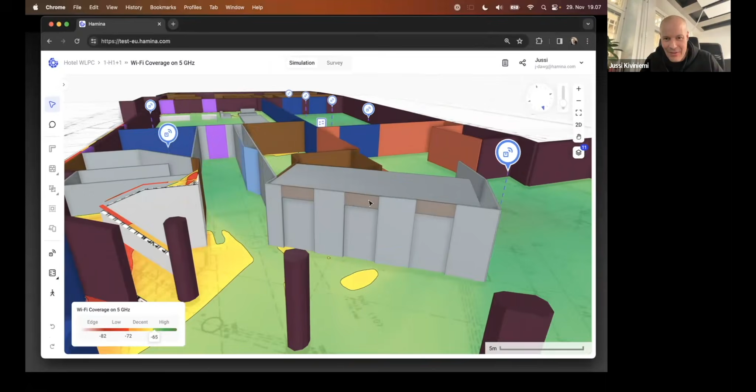A couple of things we have upcoming: 3D. The 3D look and feel - some of our guys are very enthusiastic about how the product looks, how it feels, and how it works in 3D. Let's take a look at this. I don't have a before and after, but some of you, especially heavy users, may notice slight differences in how the product looks. If you observe the shadows, how things look, how the outlines look, how some things are now shadowed, you may see a bit of a difference in the product.

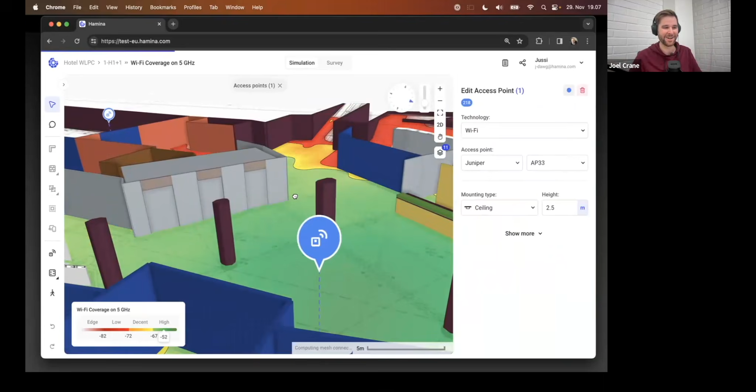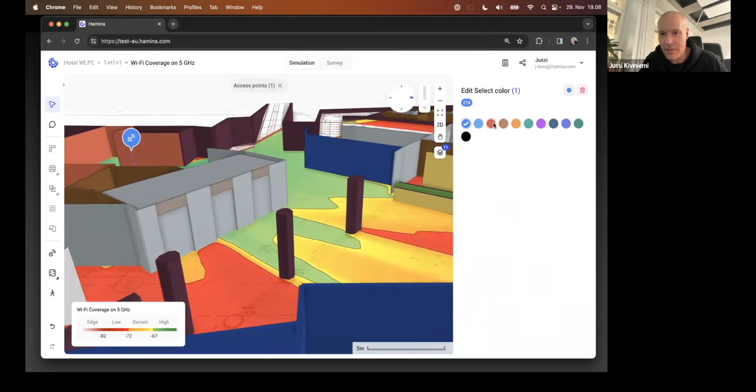By the way, anybody recognize this lobby here with the elevators, the front desk? Joel, ring any bells? Yeah, it took me just a second, but all of a sudden it clicked, and I totally recognize that lobby. Somebody put it in the chat if you recognize it. Looks like Mark wins, Petri's a close second, Martin third, and Steven says red bar - yep, absolutely, let's put the AP in the red bar. So this is the hotel in Prague. Can you make the AP red? Can you make it red? I wish we had a change color option for the AP - oh yeah, we had it from the get-go. That's right, there we go, red AP, that's definitely suitable in red. I'll put it in the corner where Drew Lenz and Sam Clements were causing some kind of shenanigans the other day.

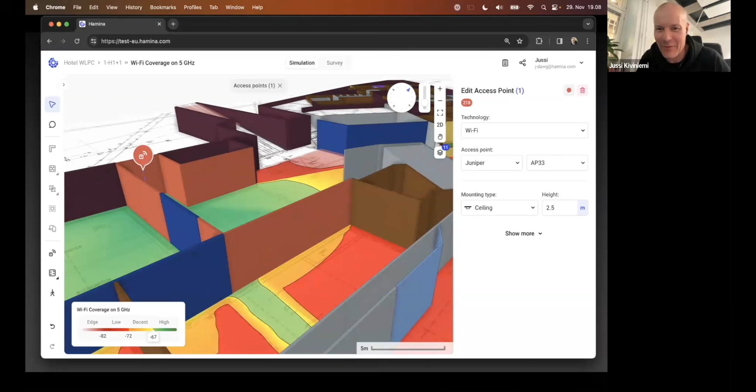So that's there, but yeah, just little things like performance improved, look and feel improved. It's trying to take care of the little things as well, because as a product manager, isn't it so tempting to look at just new features? But you're really good at keeping me in check with that, and so is our R&D - like, no, that's not gonna happen now.

So I appreciate that. 3D Roaming Man has gotten some new flavor, and there's some site survey stuff we'll talk about in a bit. Roaming Man will get a significant update pretty soon. Currently our Roaming Man is pretty amazing - you can take any client device, simulate the most common client devices and their route throughout the wireless network, see how they roam, what their performance is, stuff like that.

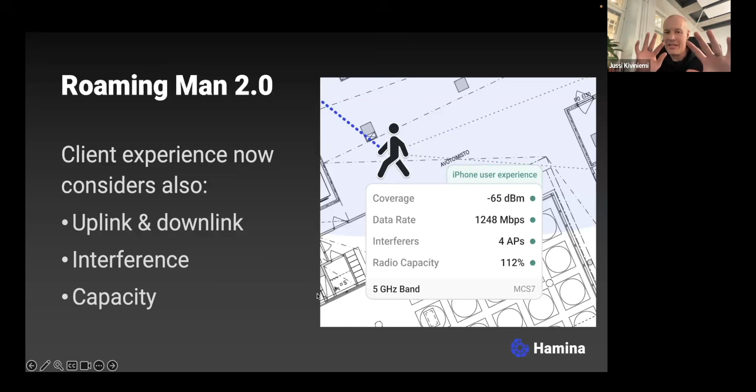In the new Roaming Man, not only does it consider things like association, roaming, coverage, and data rate, but it also looks at key well-being statistics for you as a wireless user. Things like interference, CCI, whether the radios are at overcapacity, and it considers both uplink and downlink directions.

What do you think, Joel? Should we get to the beef already? Let's do it.

And then there's the pre-deployment, often it's like AP on a stick. But whether it's AP on a stick or not, it's good to, if you have a chance, go on site and walk around a bit to get a feel for how thick the walls are, how the RF behaves. If I don't have an AP on a stick or time for one, I like to just walk around the site quickly and take some surveys, even of the existing network or whatever is out there, because even with that I can get a decent understanding of how the RF works.

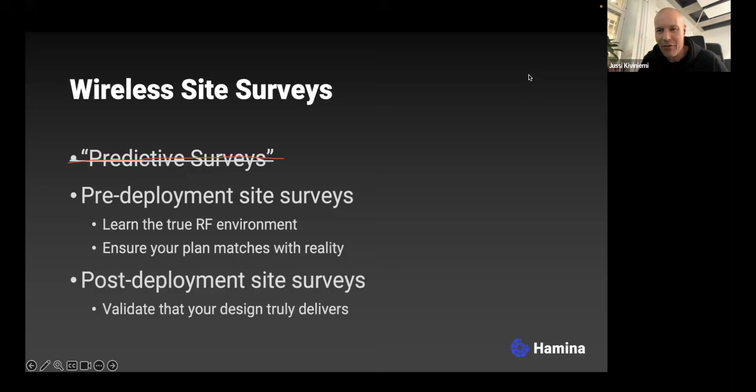Of course, there are other types of surveys, like troubleshooting surveys. I'm sure all of us tool vendors would love it if everybody surveyed every day, but let's face it, it's not going to happen. I don't think people will survey weekly, monthly, or even yearly. It's often a reactive thing. If you have time and energy, I'd recommend periodically surveying the network. But the Wi-Fi dashboards today from the leading Wi-Fi vendors are pretty good at keeping the Wi-Fi in check to a large extent. If you run into problems, that's at least when you should go out. If you can't figure it out from the dashboard, then a survey would be one option.

All right. Oh, and there's your annotation still, Joel, by the way. I have no idea how to use Zoom. Sorry, I just took it off. No worries, I was like, I don't know how to use this.

But yeah, here's really, what do you think, Joel? This is what it comes down to. This is kind of how it started, and at the basis this is still what we're doing, just with different tools. But remember in the beginning there was more of this, like dragging a wireless device around and taking measurements by hand. It's still a thing, and nothing wrong with that. No matter what the tool, isn't it still about taking measurements somehow and then writing those down in some capacity?

Yeah, I think I heard you recently compare a site survey tool to almost like a note-taking tool, where I mean, it's a lot more sophisticated than pen and paper. And remember the red solo cup design method, where you take a solo cup and the big end was your 2.4 gigahertz cell, and you flip it over, and the little end was the 5 gigahertz coverage cell.

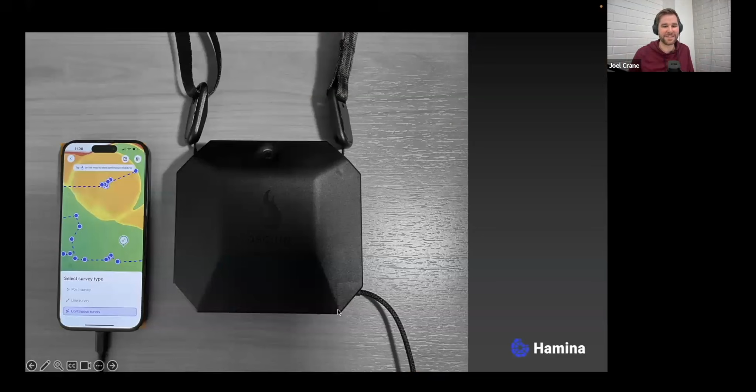Obviously, we've come a long way since doing that, but I think just about everybody has done that at some point. But now we have the ability to really take measurements and plot those on a map. So it is a note-taking tool, just a lot more sophisticated than it used to be. Here's our note-taking tool, and it does the same thing - it plots wireless readings on the map, and also lets you plot custom notes and photos. It's essentially a notepad or note-taking tool, just a little bit more advanced, lighter, and easier to use than before. But yeah, it's still the same stuff.

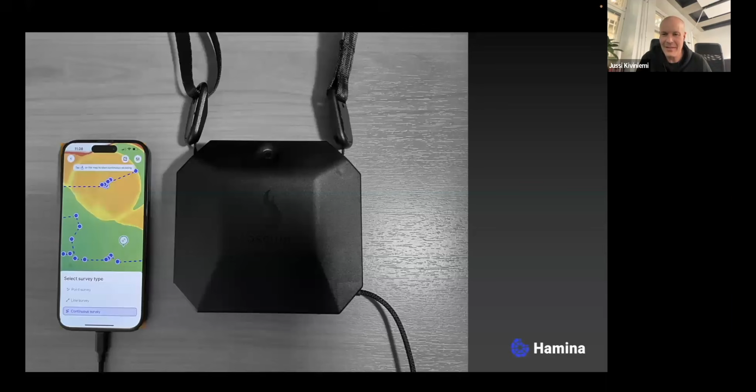So our solution, in short, is the Onsite app by Hamina, and then its connection to the Hamina cloud, and being able to see that also on the Hamina planner. And then our hardware partner Oscium has created this amazing device, Nomad, which is essentially a high performance Wi-Fi measurement device - 2.4, 5, and 6 gigahertz, all the standards including Wi-Fi 6E and Wi-Fi 7 completely supported. And the Onsite app will take a look at that.

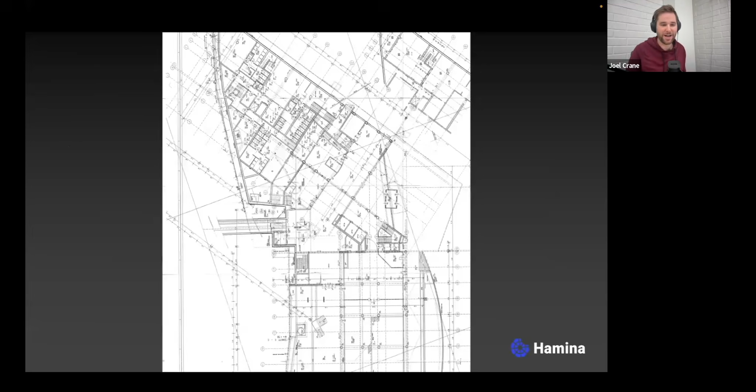Encourage people to participate in the chat, Joel. If there's a single negative comment, we will ban the chat. Sorry—yep, don't say anything negative, or you're going to get perma-banned. Exactly, and the chat will be closed. Forever. I'm kidding.

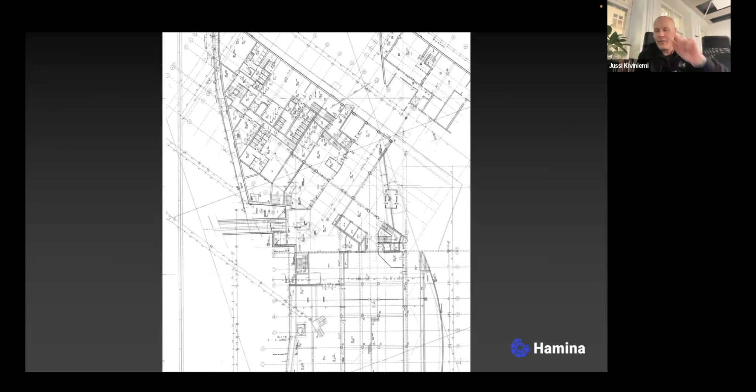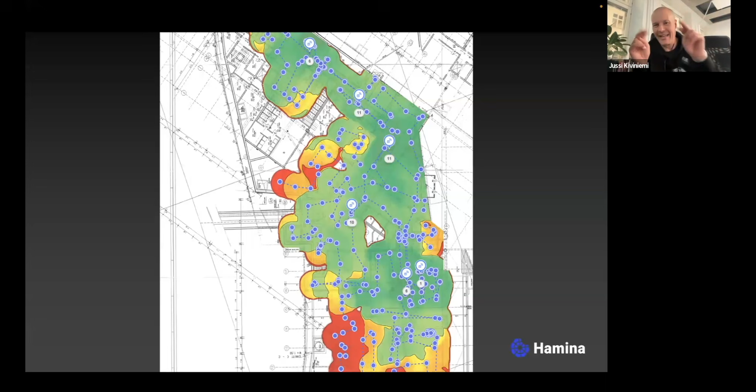Let's talk about the theory of site surveys. Here's what the Wi-Fi measurement process looks like: you have a floor plan, you take notes and walk around, and somehow your route gets documented on the floor plan. The end result is usually something like this—often represented as heat maps. There are other ways to visualize it too, but at the executive level overview, it's usually some kind of heat map. So how do we get there? How do we get to the heat map?

First of all, there are different survey types we'll cover today. These are very infrequently covered in detail, so we should look at each survey type a bit, at least the first three for now. There's manual location entry—that's just a term I made up—essentially surveys where you manually need to continuously, more or less, plot your location. Then there are some automated location entry methods as well. I actually posted a few months ago on LinkedIn about Apple's RoomPlan framework, so you can find a video about that on my LinkedIn too. I think some surveying will become automated moving forward; the technology isn't quite mature enough to be very reliable yet, but it's getting there.

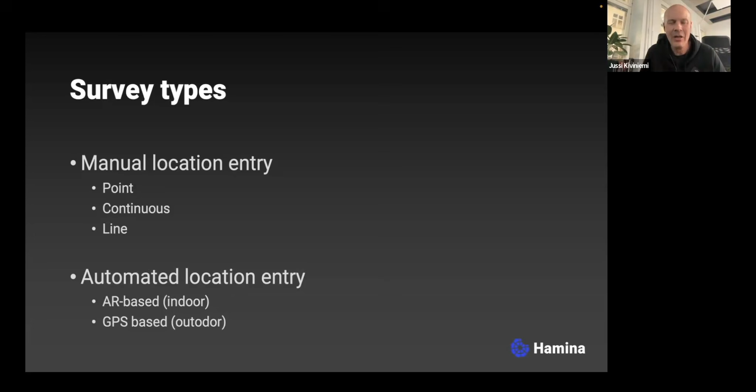Today we'll focus on the manual approach—clicking on the map. How do we click on the map? How is the survey data collected? How is the survey data plotted on the route?

Let's talk about the point survey first—there are different terminologies for this, but we call it the point survey. You click on a map, wait a couple of seconds, and the data is collected for that point. Then you move to the next point, wait again, data is collected, and you repeat that as many times as needed until you've painted the map green, so to speak, until you've collected enough measurements from the area. If I were a beginner, this would be my choice of method—it's very relaxing and easy to use. You can take all the time you want to find your place on the map, then click and wait a bit, and there you go.

However, while it's super easy and almost hard to fail, it's also great—even if you're using other methods elsewhere—for spaces that are cramped, or if you're required to take a spot from a hotel room right at the desk, for example where people work, or situations like that.

Stop and go, or point survey, is the perfect method for that. However, it can be a little slow, and data is only collected where you click. So only when you click is data collected, not between the clicks. There's no interpolation between the clicks.

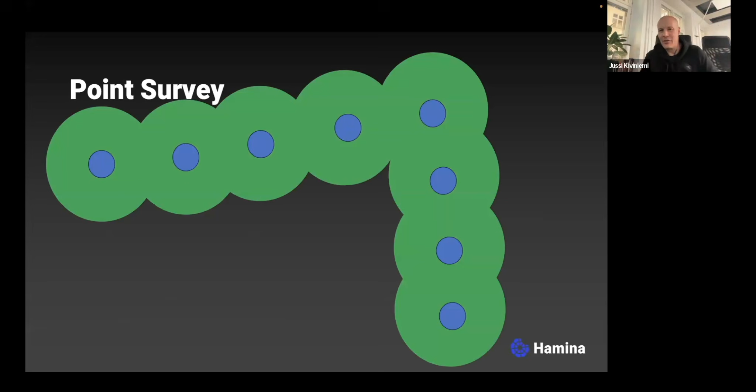For you experts, this may sound simple, but we'll get to the beef after this slide. Continuous survey means the tool is continuously collecting data. The wireless measurement device is continuously scanning all the channels in the Wi-Fi network, and your iPhone is continuously collecting all of that data. It doesn't stop, it keeps cycling through those channels and storing that data.

It's your job to keep clicking on the map all the time, every time you start walking, every time you stop walking, and every time you turn. Usually turning isn't a problem, and starting or ending isn't a problem either. But here's the challenge. This is what a typical continuous survey looks like.

With the continuous survey, the pros are it's as fast as you can walk. It's great for surveying in any location as long as you're experienced and know what you're doing. Data is collected all the time, even between the clicks. Even when we're not clicking, the tool is scanning all the time, and the iPhone is storing that data based on those scans.

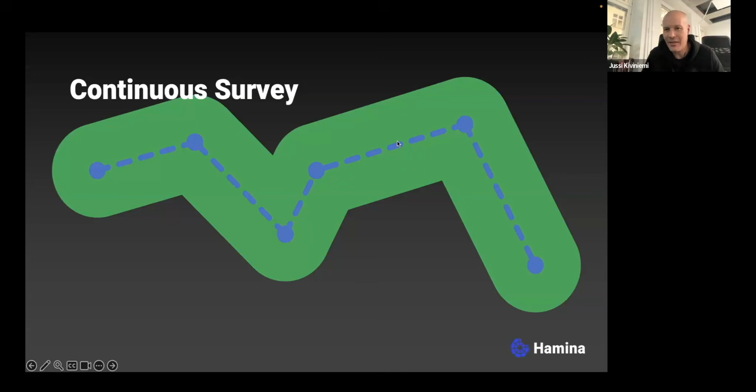So it's not only storing data at the clicks, it's also interpolating data between the clicks based on the timestamp. I know that 5 seconds ago you clicked here, 1 second ago you clicked here, so 3 seconds ago you were here. We know that data we got 3 seconds ago goes here, and we plot that. It stores data all the time until you stop the survey.

So it's great, it's fast, but here's the thing. What we started hearing more and more when we talked to surveyors while developing the survey tool, it became evident that people are not just newbies making mistakes. If you put a fairly fresh surveyor out there, they may do it wrong or shy away from continuous survey. But even people who had been surveying for quite a while made this frequent mistake. This could be a clickbait headline: you've surveyed for 5 years, you're still failing at continuous, and this is why.

So if you thought you knew continuous survey, you tap as you change direction all the time, as you walk around, you tap every time you turn. In here, you have to wait for the door to open. You wait there for 20 seconds, then you continue and you tap.

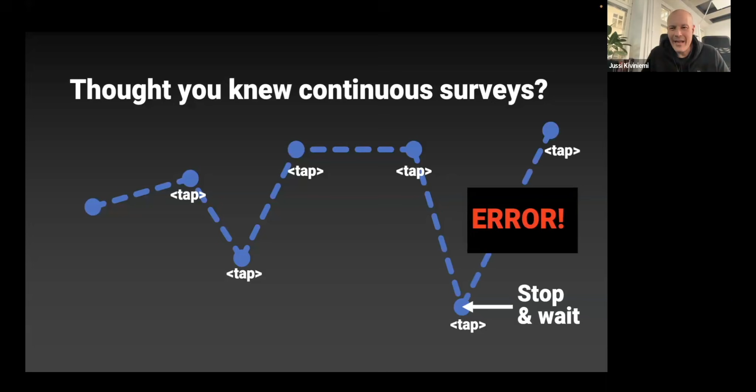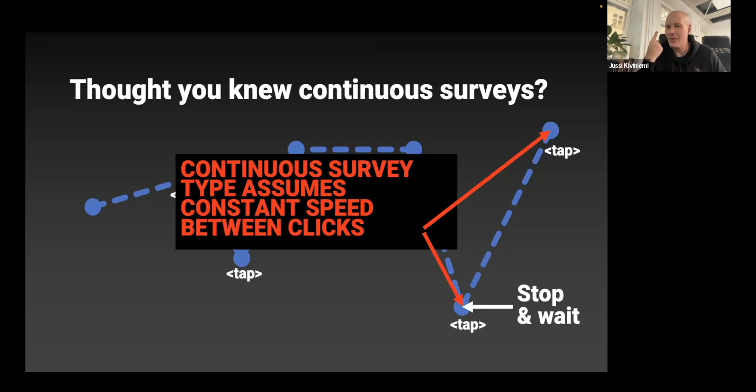Now we actually failed the continuous survey. What happened here is when we were waiting for the door to open, we were standing still for a good 10 or 20 seconds. Even during that time, the tool assumed that you're somewhere between these 2 points, although you're not, because you were standing still and didn't indicate that to the tool. Continuous survey assumes if you click in 2 different locations, you were between those locations very evenly throughout your walk. It always assumes a straight line and a constant speed.

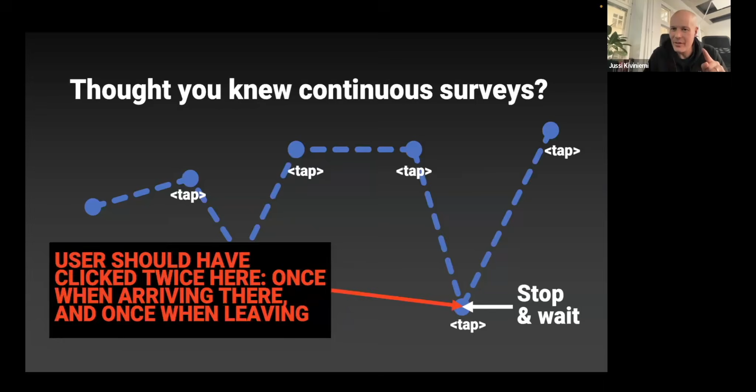What should have happened is the user should have clicked twice here, once when arriving at that location and once when leaving, because he took a break there. Otherwise, that data will not be correctly associated. So let's do it the right way.

Tap, change direction, tap, change direction, tap, walk on a line, change direction, tap, tap. Now we stop and wait here, wait for the door to open. Okay, there we go, we can continue. Another tap to indicate that I actually spent those 20 seconds here.

So when I arrived at that location, I tapped. After waiting, I tapped again, and there we go. I wish I got a dollar every time I see this not being the case. I totally understand, you're under stress, surveying, talking to people. This happens to me all the time. This is the number one thing that trips up even experienced continuous surveyors.

So tap two times. Once when you arrive, and if you spend more than a second or two there, tap again when you leave that location.

So this is why we brought the line survey. We thought point survey is super easy but a little slow, with no interpolating between the clicks, while continuous survey can be tough for noob surveyors. So we wanted line survey, where you click when you start, click when you arrive at a location, then take a break, then click again and do another line. Between the lines you can actually take a break, so it's more stress-free. It combines the continuous data collection with the stress-freeness of the point-based survey.

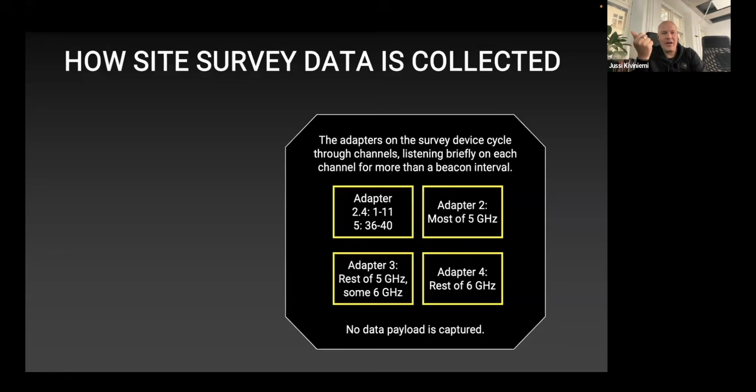This depends on whether you're in Europe with 500 megahertz of 6 gigahertz space versus the US, where you have more than twice that, 1200 megahertz of 6 gigahertz space. So the way we allocate channels between the different adapters depends on your region, and we work it out for you automatically.

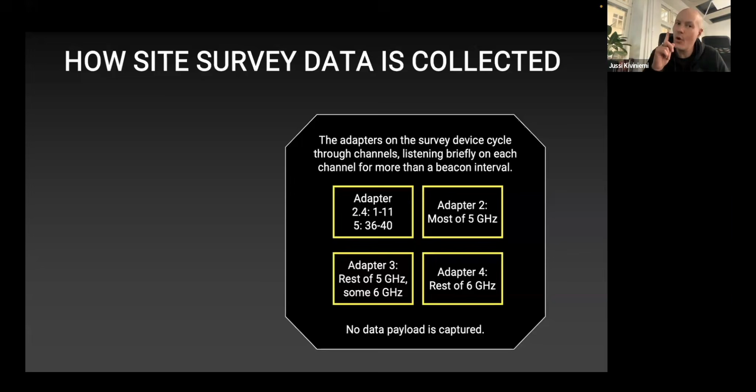What's notable here is no data payload is captured. We do not capture user data, nothing like that. Only management frames, and in our case it's a listen-only device, so it doesn't transmit anything. I think that's the case for most of these kinds of devices.

As that measurement happens live, we are pushing that data into your iPhone, iPad, or MacBook, and at the same time you're plotting your route as you go. We're also pushing that to the cloud whenever the phone has a chance. But just like Joel said, the phone can completely work offline as well, and when it gets a cloud connection, it will sync it up there. As it syncs to the cloud, it will also be visible in our browser-based network planner app.

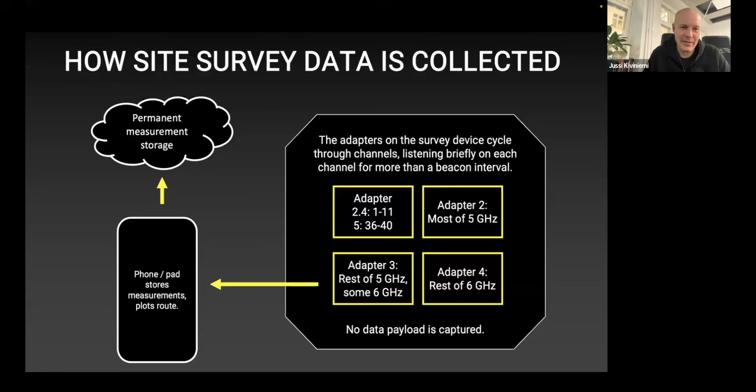Joel, how are we doing with the chat? There are so many chats, people are blowing it up, and even after you threatened them they're still blowing up the chat. So okay, next time definitely no chat. We're turning it off after this, and people keep asking hard questions that are difficult to answer. Unacceptable, man. So real quick, if you have questions, keep throwing them in the Q&A tool. I'm way behind on answering them, but that will make sure I actually get to them if they're in the Q&A tool. The chat's totally fine too, I'm answering some there as well, but please keep going. This is great, I'm having tons of fun over here. Jussi looks like he's having fun too. Nice work everyone, thanks guys, keep it coming. It's almost like there's two webinars happening, one on the chat and one in here. Too bad it's the last webinar on the chat. That's it for the chat jokes, kind of like a dad joke, chat joke, whatever.

So anyway, why did we take four adapters for the wireless device? Well, it's pretty simple math, actually.

We just look at, okay, how quickly do we need to walk? As quickly as a human can typically walk without bashing himself into furniture and stuff like that. So we figured, how quickly can you walk, and how often do we need the points to be plotted on the map to have accurate data representation? Then we looked at how many channels, worst case in the States, which has, and a few other countries that have 1200 megahertz of 6 gigahertz and 500 megahertz of 5, and the typical 11 or 13 channels for 2.4.

So we came up with something like this: at least every 3 seconds you'd need to get an update to get accurate enough, granular enough data. That's how we came to 4 adapters, assuming we wait 100 milliseconds per channel roughly each time we go to a channel, then the next channel. Each of those adapters is doing 10 channel changes almost per second. That's a lot of listening, switching channel, listening, switching channel. 4 adapters, each doing that 10 times per second.

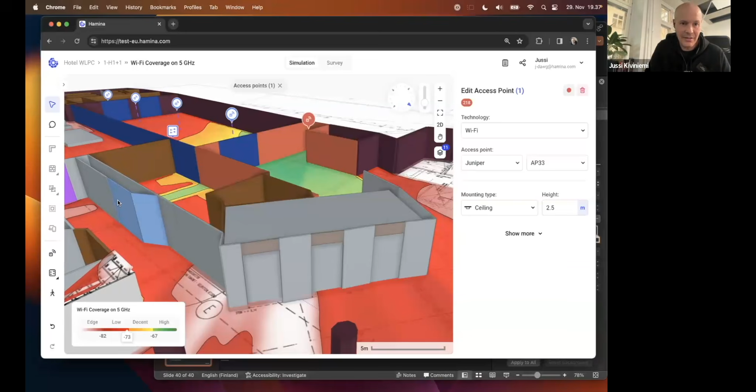There we go. I wonder if I can share wirelessly. I need to share my phone wirelessly here, because if I can't, I can totally take a stab at it here. I should be able to. Okay, I'm hoping AirPlay works here where we are. Let me exit that. I'll let you know when I can see it. It should work, the Apple Wireless Direct thing, I think it'll work no matter where you are. It shouldn't rely on anything else. It should be okay. Give it a try and see.

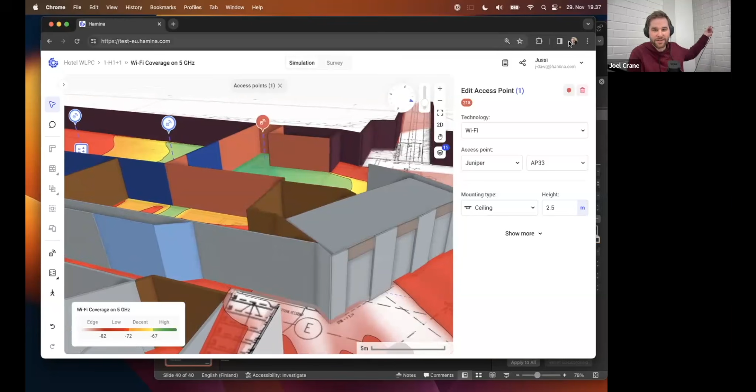So here's where we select the devices and all of that. You can also use WLAN Pi, right Joel? Yes, yep, you can use WLAN Pi. We figured that the best tool for the job is the one that you have with you. So if your Nomad is somewhere else and you have a WLAN Pi with you, then you can absolutely use that. I've done several surveys with that now, and it works pretty well.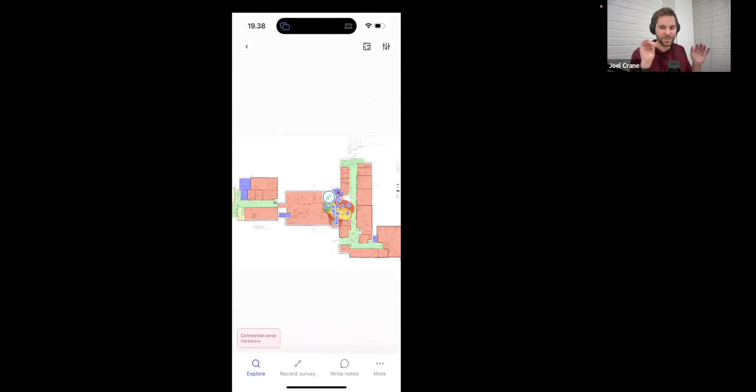The one main disadvantage of the WLAN Pi is in most scenarios, you're limited to 2 Wi-Fi adapters on it. Not in all cases. And then the second thing is getting it connected to your phone - there's kind of a little dance depending on which WLAN Pi you have and which iPhone or iPad you have. So if you want the simplest way to go, it's Nomad at the end of the day, but it's nice to have it as a backup.

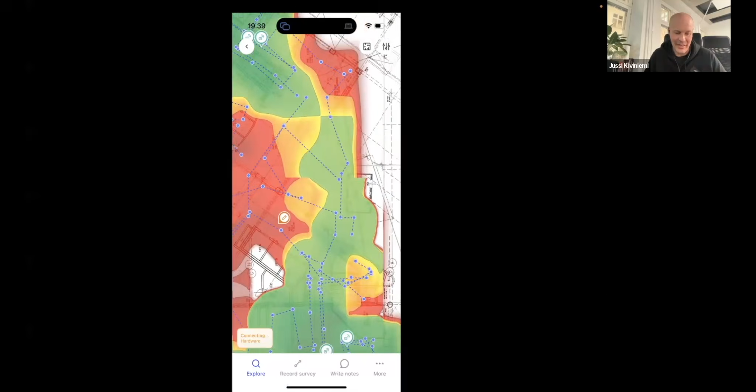Absolutely. And what I really like about it is how you can search for the project. So if I wanted to search, remember the hotel in Prague we were looking at? Was it Hotel WLPC? There we go, we can just search for it. And if we have the project in cache, it doesn't even need an internet connection, it'll just be there. So that's pretty cool.

You have all the heat maps, you have the survey routes here, you have the different survey methods. So if I go to record survey, I can select between point, line, and continuous. I have my data coming in, and I can see the exact dBm value.

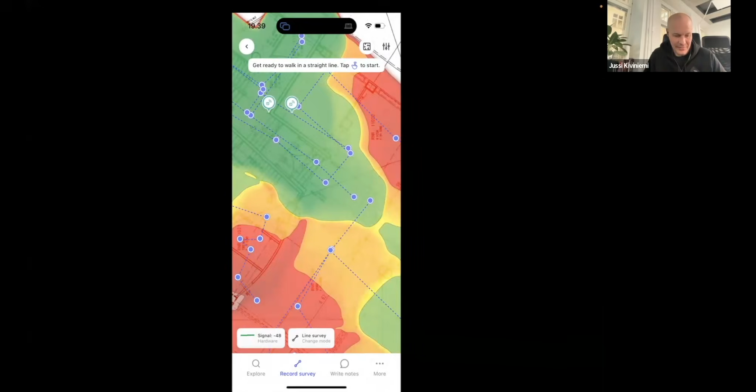And I can actually see it also. Let's do a mock-up survey here. So I'm just gonna say, during my survey, I can actually see my signal strength really clearly, so I know when I'm running out of coverage.

We actually had a customer call just an hour ago, and they were asking for this, and yep, it is there. And you can see how when we do the survey, it actually fades out the heat map nicely, so it gives you room and makes it clear for you to survey. It gives you notes as well, so you can write notes, take pictures, it's all there.

And what I like about it too is it's fully blown, so it has things like a real-time view. I'll just move the unit to get some differentiation on the signals at this office. You can see your primary signal, your secondary signal in real time for all the bands, including 6 gigahertz, one of which we have here. And on 5, of course, we have more. So it gives you primary signal, secondary signal, as well as your loudest neighbor, updated in real time.

And what I really love about it is the channel interference view, where we can see easily how crowded the channels are. At this office, the channel distribution seems really, really excellent. And it of course accounts for ACI on 2.4, it accounts for wider channels, all of that.

And here you can see this is actually a display of ACI, right? You have an AP, a loud AP on channel 6, so you can see how they also radiate on the other channels, stuff like that. You have SSIDs listed there, all the SSIDs, and then the individual APs as well.

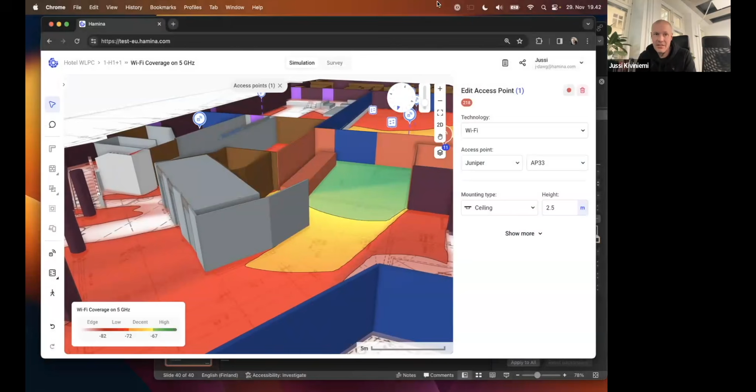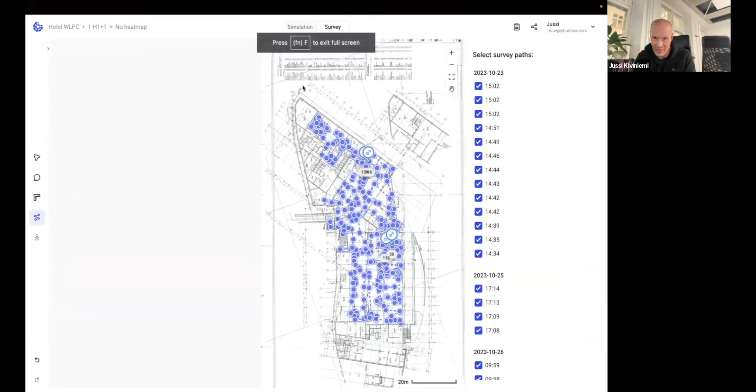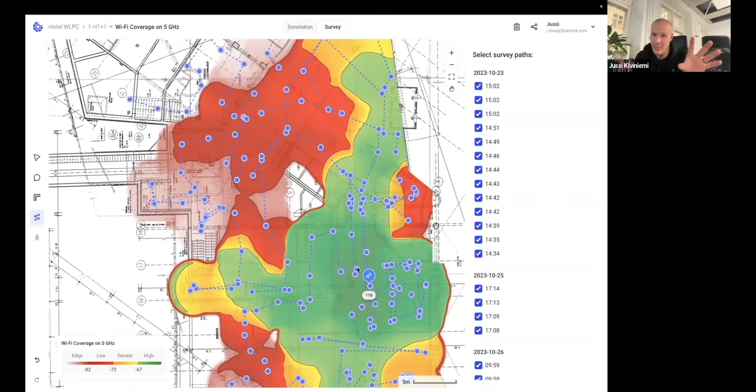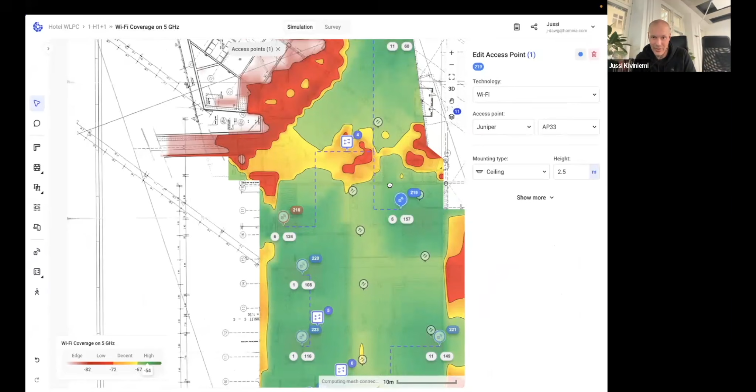So let's take an example here of the famous Prague hotel. Now you see these two tabs here, a simulation tab and a survey tab. We can look at coverage for different SSIDs, different frequencies. We can select and deselect survey routes here very easily. It's all here, and it's just incredibly fast, incredibly convenient. Over Zoom, you cannot really experience how fast the thing is, but if you've used Hamina Network Planner, it is that same ultra fast experience. So, super quickly between simulation, survey, back to simulation, predictive modeling, all of that. So yeah, that is that.

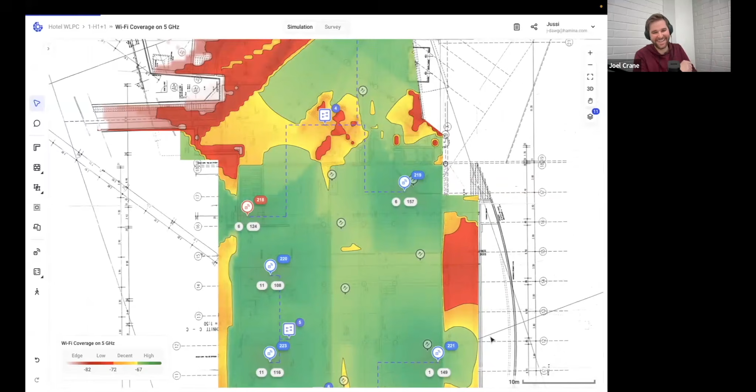Joel, what do you think? I think, have you been demoing or something over here? I've just been answering questions, so I'm not even sure what's going on. I wasn't even sharing my screen. I've been demoing to myself for the last 2 hours. I think everybody left. No, there are so many great questions.

One that's come in several times is what about Android support? So I think we should tackle that one head on. To all you Android users out there, I hear you. I'm a huge fan of Android. Android was my very first smartphone, and I've always had an Android phone, sometimes primary, sometimes secondary. Love Android. We decided instead of half-assing two things, we decided to whole-ass one thing. That's a quote from Parks and Rec, some of you may have recognized that, but we decided to focus on one platform. With one code base, we're able to support iPhone, iPad, and Apple Silicon Mac. It's literally one code base, the compiler just spits out three packages or something like that. The developers will probably say it's not that simple, but it does allow us to very quickly develop for those platforms. So for now, we're just sticking with iPhone for the foreseeable future. I think that's where we're going to leave it for now, so hopefully that's not a problem.

One thing I will point out is that a 9th generation iPad is $330, so it's pretty inexpensive to grab one, and maybe it's a good chance for you as an IT professional to explore another platform a little bit, get to know another platform. It was hugely beneficial to me the first time I got an iPad after using nothing but Android for so long, to learn something about that ecosystem. So yeah, I hope that's okay for everybody, sorry that we had to make some difficult decisions on that.

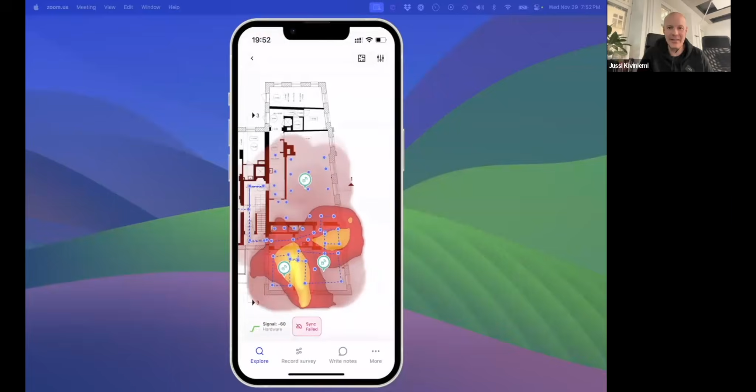That probably is possible. I'm worried we'd get jitter, but definitely possible. But one thing I wanted to show you really quick that we do support today, this was just a little extra thing that we decided to throw in here that I have absolutely loved. Now the effect isn't going to be as good for you here on my screen, but actually, no, I think it'll work just fine.

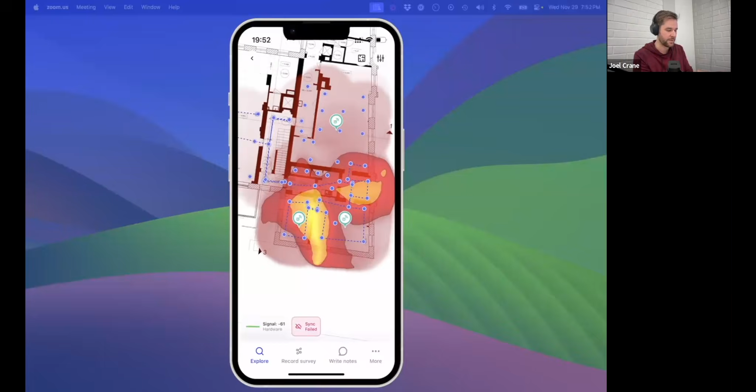You can basically 2-finger rotate the map, and it basically locks to 90-degree angles. So you see how it kind of snaps. And what I love about this is I typically don't rotate it while I'm surveying, but I'll just orient myself against a wall and then rotate it to where I'm like, okay, that's forward to me now. And then I'll go do my survey without really doing any more rotations, but you might actually want to rotate it multiple times while you're surveying.

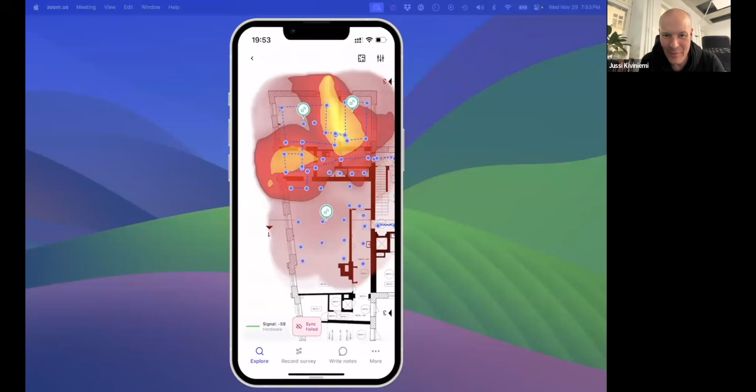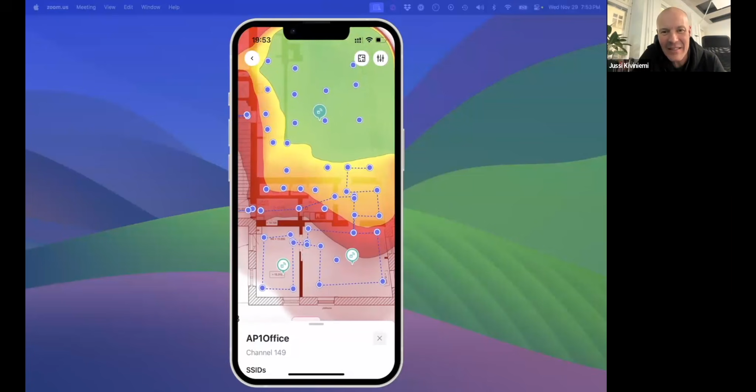And I do it personally, I also rotate it during the survey because I'm so bad at reading the floor plan unless I'm walking north on the floor plan. I absolutely love this feature. I think it was Pasi, our guy from up north, who actually came up with this and fine-tuned it, and it's really, really great, I really like that. Yeah, that's just one of those features that sort of emerged and ended up being so much cooler than we even thought when we built it. So yeah, that's pretty exciting.

Cool, okay, moving along, back to Dawn's question. So now that we're using 80 megahertz channels in 6 gigahertz, and the beacon is sent on the primary channel but not necessarily the data, how does the tool parse that?

So Jussi, correct me if I'm wrong here, but if I remember correctly, we've got 2 adapters available for 6 gigahertz. Aren't we looking at the preferred scanning channels with one and then filling in the gaps with the other one? I thought we were doing something like that, but I don't remember off the top of my head. I don't think that's the default behavior, but I'm not sure.

I'm pretty sure I specified that. So I think in our first simple iteration, maybe not, but for 20 versus 80 it's easy to parse from: we go through every single 20 megahertz channel, PSC or not, and parsing that channel we get like, okay, this is an 80 wide, this is a 20 wide. So it's all there, every channel gets scanned, and from there we can derive how wide the channel is.

See, this is how Jussi and I have our alignment meetings - we just host a webinar and hash it out in front of a couple hundred people. Exactly right, I'm glad we get to.

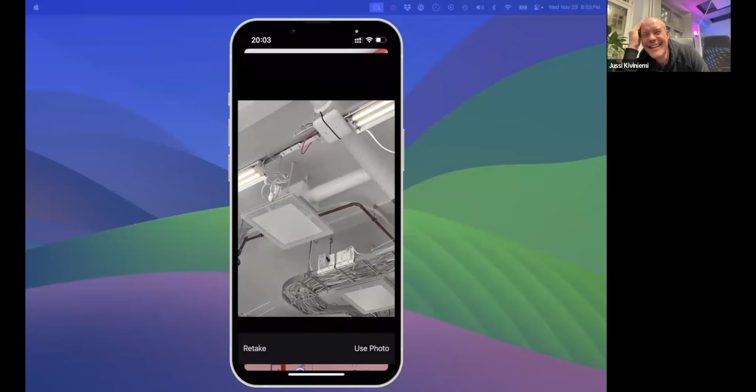Now I have added a note to the project that's going to get synchronized up automatically. So yeah, there you go. Yes, you can do notes.

So we really should fix our APs here. Somebody put in the chat, do you have APs hung up in worse ways than that? Somebody let us know, please validate us. I'm begging you, please.